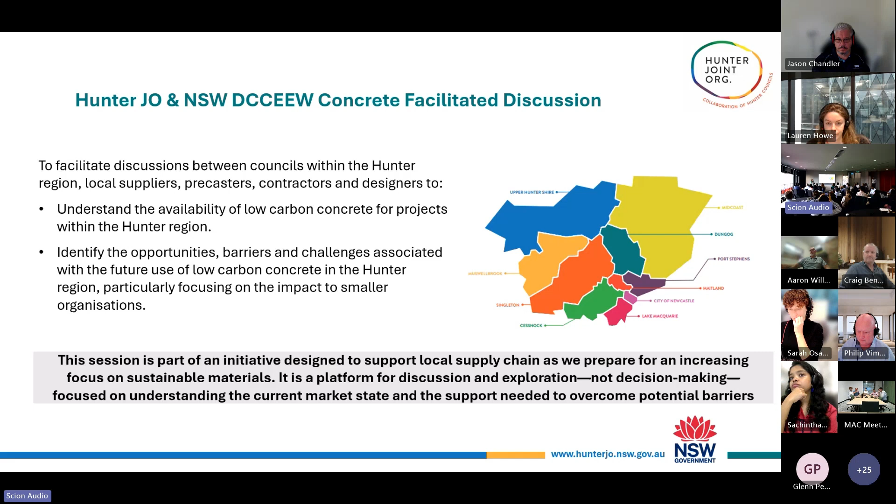I've just gone back, beg your pardon.

So the Hunter Joint Organisation, what are they? I always get asked that when I tell people where I work, and they think I work for like a joint specialist, physiotherapy or something, but we are a local intergovernmental body. We identify key strategic priorities that make sense to work on a regional basis rather than a local basis, and we advocate for these priorities.

This specific event is part of our circular procurement for local government procurement project, and it aligns with a lot of our strategic themes and key opportunities identified by our mayors in the region. It's become obvious to us, in my discussions with councils, that councils really want to support local suppliers - that's a real wish from their point of view. I think we have potential by working together as a region to accelerate sustainability and net zero goals for everyone. That leads me nicely into Chris's slides, who's going to talk a little bit more about why that matters.

Thanks, Susan. G'day everyone, it's nice to see you all here. Aside from the obvious, I thought it was important to talk about some of the recent regulatory and policy changes that have occurred, which impact both the private sector and the government sector in terms of their emissions liability and reporting requirements.

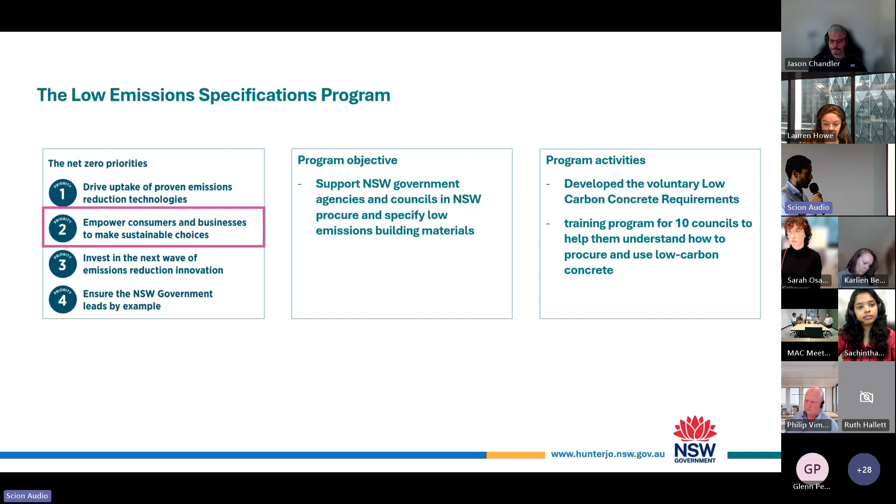Some of those initiatives within that project, the first one was developing requirements for low carbon concrete. Last year, we partnered with a couple of New South Wales government agencies, Water New South Wales, Health Infrastructure, and Landcom, and we developed this requirement.

So we essentially went out to industry and wanted to know what products are available in the market. Based on that, we wanted to nominate some targets, give them to agencies and councils and say it's okay if you ask for low carbon concrete products that have a 50% SCM replacement level.

We know that there are some products available in the market, with the big asterisk that availability might be subject to engagement with your local supply chain, because we know that some of these products are available in metro areas, but they might not be available in regional areas. That's some of the work we're trying to incentivize. The big caveat is it's subject to conversations with your local supply chain.

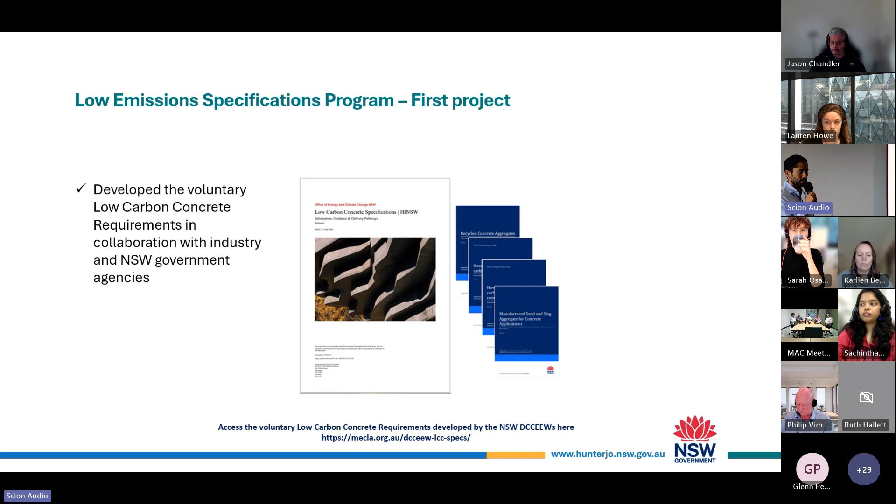After we developed the specifications, we wanted to support agencies and councils across New South Wales implement the specifications. There's about 128 councils in New South Wales. We couldn't engage all of them, but we did start with 10 councils.

And lucky for us, 3 of those councils we engaged are here in the Hunter region, so the Mid Coast Council, Newcastle Council, and Lake Macquarie. They participated in this project. We essentially brought the specifications to them and got everyone in one room in a series of workshops, trained them, and provided guidance.

There were some councils that, even though they had already implemented low carbon concrete products in one of their projects, they often didn't even know that that was the case. It might be that that project was led by a green champion within that organization, and they knew about the implementation of the low carbon concrete product. But once you get the procurement teams and the sustainability teams together, they don't know these products are available because it hasn't been embedded into a more long-term consolidated strategy. So it's still in that kind of state where you might have worked with someone, but their own organization doesn't know there are available products. Having said that, we see an emerging interest in implementation of low carbon concrete.

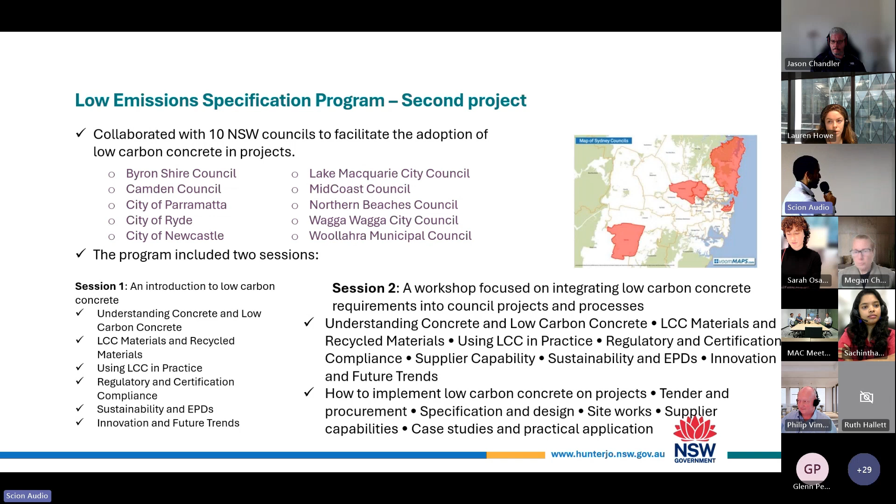So now, call to action. Through our engagement with these 10 councils, the first question was that suppliers aren't seeing the demand for low carbon concrete. So I think one of the objectives of today is we wanted to get the councils together so they can start signaling upcoming demand.

And we also want them to hear that there is local availability of low carbon concrete. Some of their team might be aware, but in general, as councils, they're not really aware. I'd encourage everyone here to reach out to these councils and explain your products, what's available in the market. Talk with those councils about any challenges, like smaller suppliers of low carbon concrete not having access to fly ash. That's the type of issue we want to know about, because connecting it back to funds and grants, that's something the New South Wales government could potentially help with. We know this is an emerging conversation, it's new, so encourage you to have those conversations and let us know about issues and challenges.

If we step back to the most fundamental level of what actually is concrete, concrete is a mixture of different constituent materials. This includes cement, aggregate, sand, different admixtures, and water. We make cement by heating clay and limestone at very high temperatures of up to 1450 degrees, and then grind it together to make a clinker. This clinker is then mixed with a small percentage of gypsum to create Portland cement. We add the gypsum to the clinker to slow down the reaction of that clinker with water, otherwise it would react too quickly.

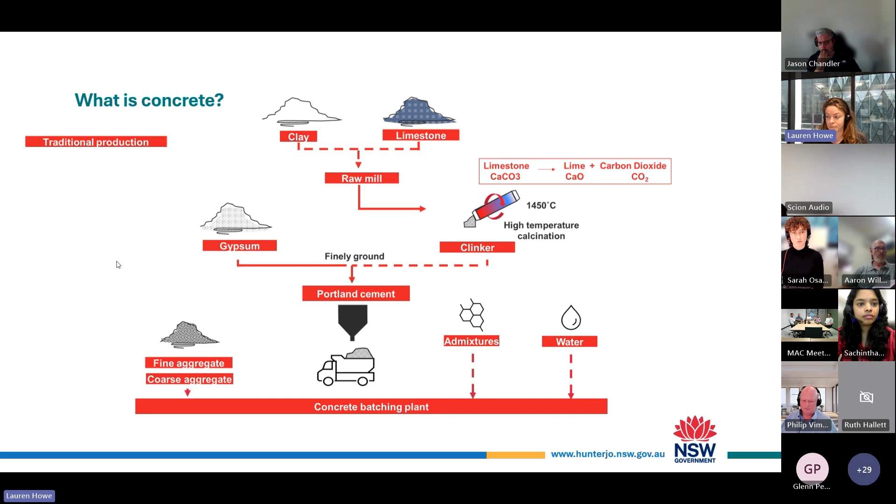Today we are talking about the carbon impact of concrete, so I wanted to explain what is embodied carbon. It is the greenhouse gas emissions associated with the materials and construction processes through the whole life cycle of a building or infrastructure, like a bridge or even a pavement. This includes all the emissions associated with everything from the extraction of raw materials and manufacturing through to transportation, construction on site, and then end of life.

So what is the impact of concrete, and why did we choose as part of the low emission specification program to focus on concrete? A number of reasons for this. Concrete contributes a huge percentage of the global CO2 emissions for one material, about 7% globally. But it is a material that is a bit of a low-hanging fruit - as designers, specifiers, and all the stakeholders working across the value chain of concrete, we have a huge opportunity to reduce the impact.

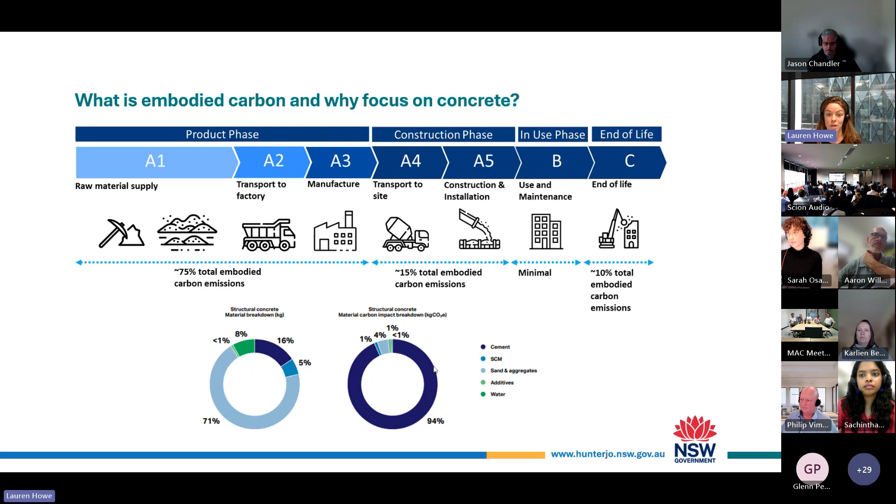This pie chart shows the breakdown of concrete by mass. Around 16% of a typical mix is cement. But when we look at it from an embodied carbon footprint perspective, over 90% of the carbon of that concrete is from the cement. The good thing here is we have a big opportunity to actually start to reduce the amount of cement that we use in our mixes.

So how can we reduce the impact of our concrete? Working back through the process diagram of how we produce concrete, the first thing a manufacturer can do is look at how they reduce the impact of manufacturing that clinker, for example using alternative fuels. Then as we work through the process, you can reduce the amount of clinker that actually goes into the cement - you might have heard of things like GL cement, where you're using higher percentages of limestone.

Then the way, which is the focus of the event today and what most people know in terms of how we reduce the carbon impact of concrete, is to substitute some of the cement going into your mix with other materials. We call them supplementary cementitious materials, or SCMs. Examples of these are fly ash, as Alberto alluded to earlier, which is a byproduct of the coal industry, and blast furnace slag, which comes from the steel making process.

Other ways we can reduce the impact might not be carbon related, but still reduce the amount of virgin material used, is in replacing fine and coarse aggregates. You might replace your fine aggregate with manufactured sand and your coarse aggregate with recycled concrete aggregate. Overall, there are also opportunities that manufacturers are looking into in terms of carbon capture and storage.

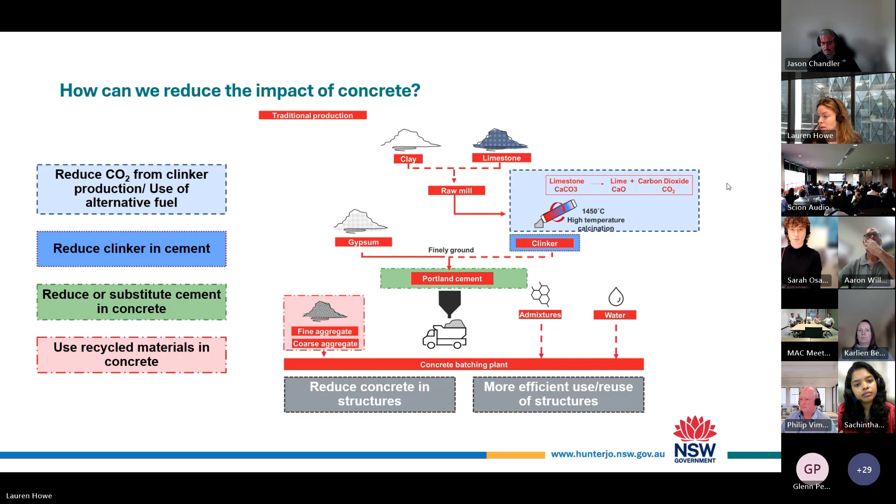You'll often hear people saying low carbon concrete. Firstly, there's not really a globally or even nationally accepted definition, but generally when people are talking about low carbon concrete, they are referring to concrete that has been produced with a reduction in the cementitious or cement content, replacing cement with supplementary cementitious materials. But as explained before, there are other ways a manufacturer works to reduce the impact of their processing and find efficiencies to bring down the impact of their mix.

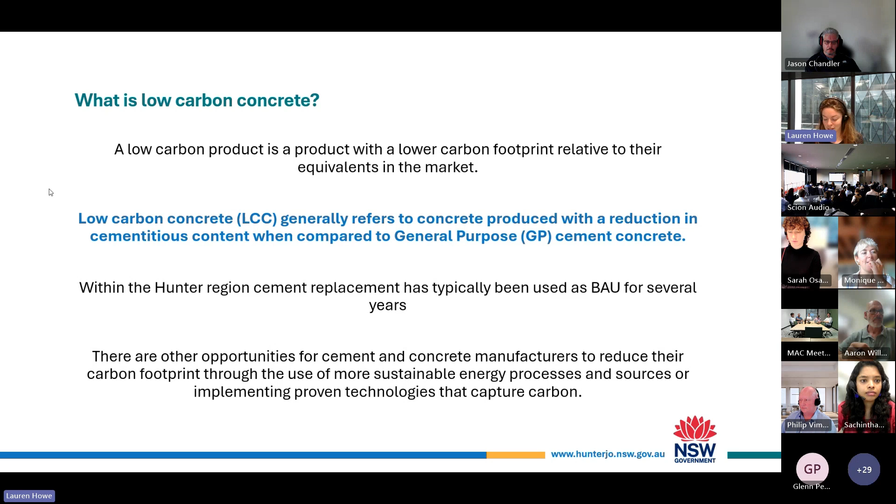I think there's something in terms of the Hunter region. We know that typically higher levels of fly ash are being used than in other regions across New South Wales. So there needs to be consideration that the definition of low carbon for the Hunter region is higher than what might be for other regions in New South Wales, just because you'll find that a lot of suppliers are doing a certain level as business as usual already, because they have the supply of it nearby.

So then, what are the benefits of adopting low carbon concrete on your projects? The main benefit, and why we are all here today hopefully, is the opportunity to actually make real impact and reductions in terms of our environmental impacts, so our embodied carbon and also use of virgin materials on capital and maintenance works for councils.

In terms of durability, the use of fly ash and slag in a concrete mix will reduce the permeability of the concrete, and therefore it helps to improve the durability when the concrete is exposed to aggressive environments. For example, if you have high levels of sulfates or chlorides, such as in a maritime environment.

And the mixes have been, when you speak to the suppliers, they will all be developing their mixes to meet the same properties as what you have specified if you were to use your ordinary Portland cement or traditional mix, and therefore there is no impact to maintenance and therefore no impact on long-term costs.

There are, of course, challenges, which is why this isn't something that's just being done straight away for everyone everywhere. We're aware of a lot of these challenges and barriers, and through the work Arup's been doing, working with lots of councils, we've been collating all these to try to understand what are actual barriers and what are perceived barriers, doing a lot of myth busting.

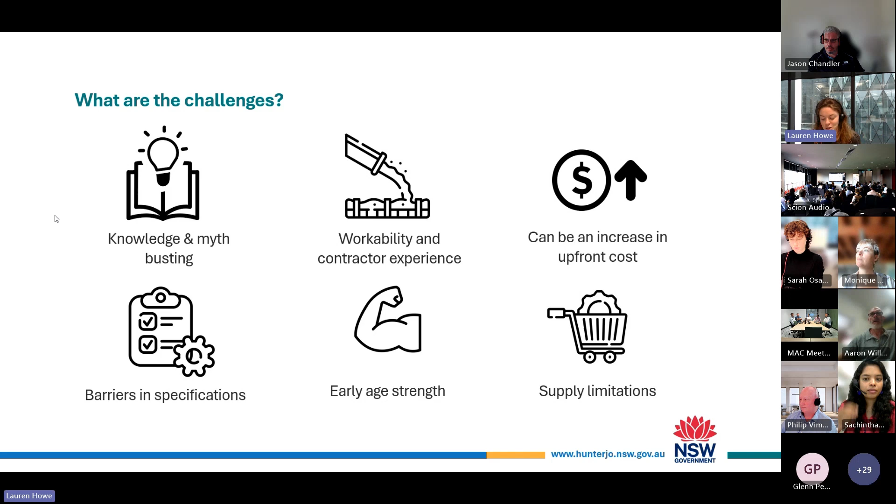And then finally, we put supply limitations here for the Hunter region. I would say this is not an issue, and this is something that Sachi is going to talk through now of what we've found out from your region. We've got many suppliers in the room and online that will be talking about this during the breakout sessions as well.

Thanks, Lauren. So I'm Sachi. I'm also from Arup.

As Lauren mentioned, often we hear supply capabilities as a barrier or a challenge when it comes to using low carbon concrete. From what we are aware of, there are 18 suppliers in the Hunter region, and throughout this project we have engaged with 15 suppliers to get to know their supply capabilities in terms of low carbon concrete.

So we asked them a couple of questions, like whether they provide low carbon concrete, and if they do, what are the replacement percentages that they use, and what types of SCMs, etc. I'll go into the details at a later slide.

So this map we developed to map out the concrete plants in the Hunter region. Each dot represents an approximate location of a concrete plant, not a specific supplier. For example, one supplier can have 3 plants, 3 small dots scattered around the Hunter region. I should say that this is based on our engagement with suppliers, and also we did a Google search to find out concrete plant locations. So there could be more plants, and this is just an estimate.

So for most of the councils, we have a minimum of 2 plants within the region, within their boundaries, or within a 30-minute drive.

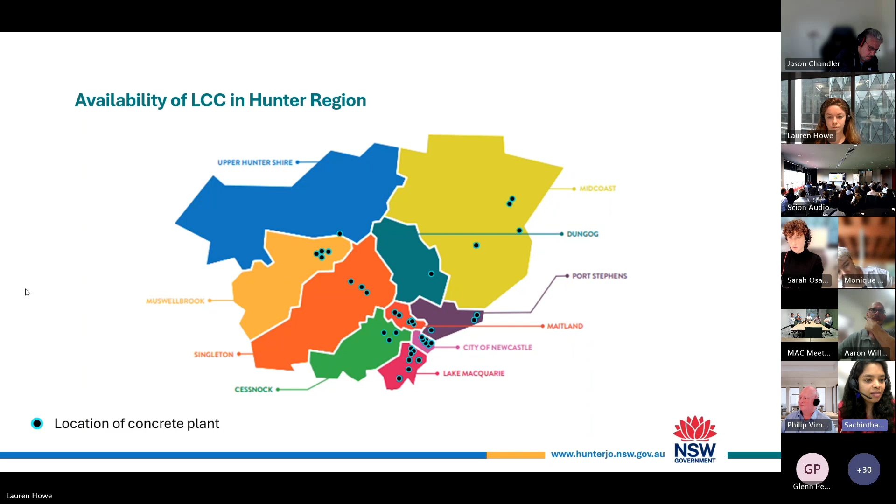Moving on to the questions, from these 15 suppliers we engaged to get low carbon concrete, we focused on getting information on fly ash and slag, or GGBS, which refers to ground granulated blast furnace slag. Most of the feedback we got was positive.

They do have low carbon concrete in the Hunter region, and we have received 2 feedbacks from 2 smaller suppliers saying that they don't provide low carbon concrete.

Also, we got to know from most of the suppliers that they already include a percentage of fly ash in their mixes as business as usual, like Lauren mentioned earlier. So in that case, they don't specifically name these mixes as low carbon concrete, but they do have a percentage replacement of fly ash in their mixes already.

In terms of replacement percentage, I want to highlight the word replacement, that we ask for a cement replacement. So it means these mixes have to replace some cement content with SCMs. It is not simply adding SCMs on top of the cement content that you already have in the mix, because if you do that, it won't be low carbon concrete. It will have a higher embodied carbon compared to concrete without SCMs. So it is important to highlight this is a cement replacement.

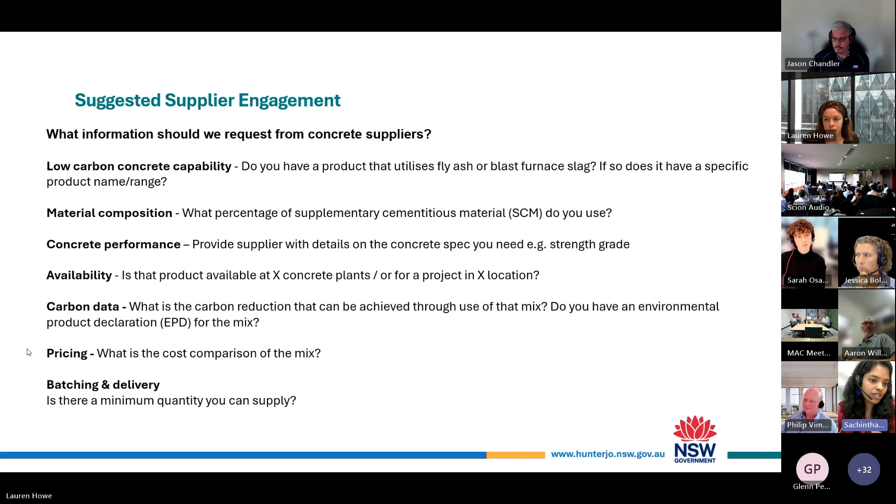So that's the section on supply capabilities. Thank you.

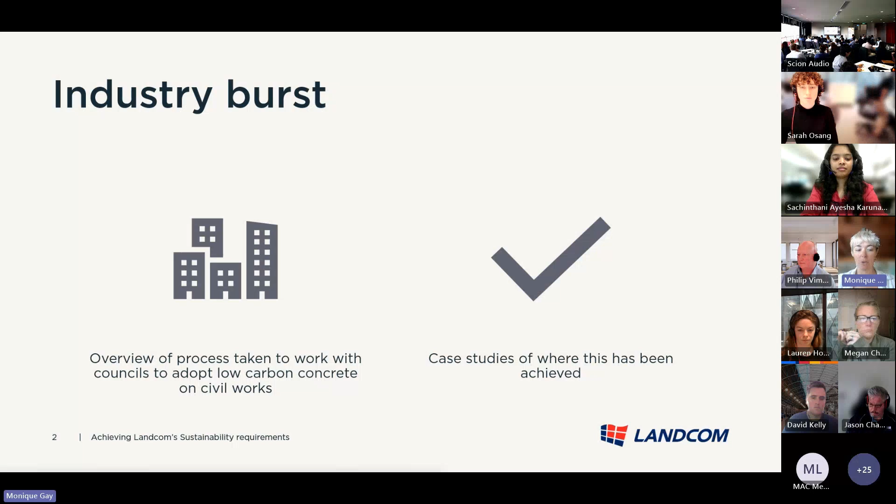I'll touch on our key drivers first in terms of adopting low carbon concrete. Our Sustainable Places strategy was adopted in 2017, and we're now well on our way delivering that as we look towards our 2028 leadership goals. One of those goals, which was quite bold at the time, was to enable carbon neutral, water positive, zero waste, and net positive ecological outcomes by 2028.

Over the past 12 months, we've taken the next step and pivoted towards our transition to net zero. While we don't know how to fully decarbonise the built environment at the moment - it's a bit of a beast - we do know we need to adopt all the low carbon materials and technologies available to us today in order to get there in time.

So why civil in particular? We've estimated that our construction activities are responsible for around 75 to 90% of our scope 3 emissions. While our corporate operational emissions sit at around 1,000 tonnes of carbon per year, that's roughly the same as the emissions from providing civil infrastructure for just 200 homes in one of our communities.

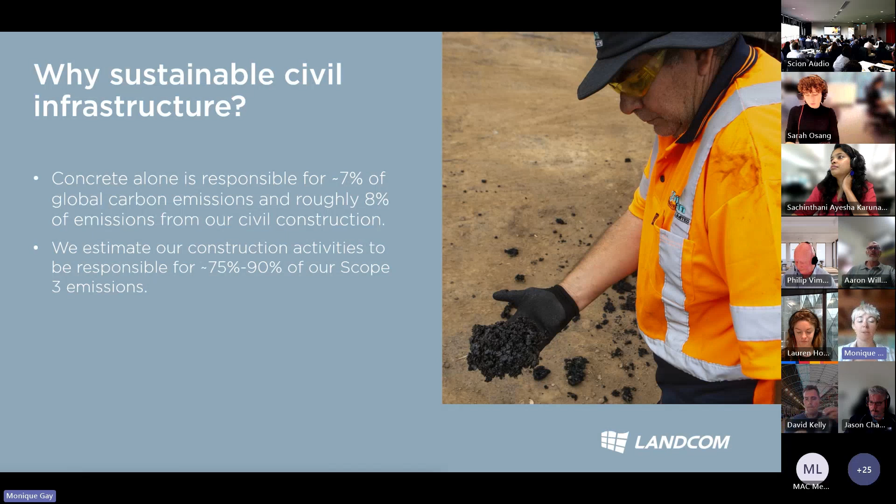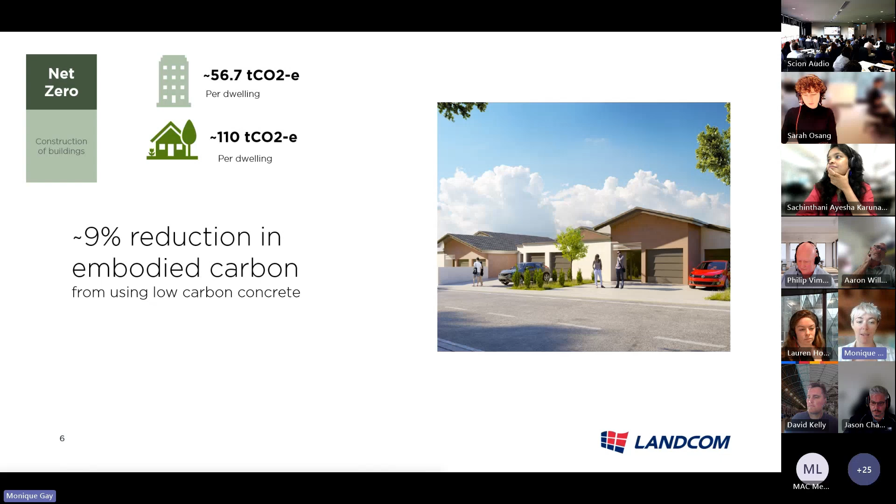We know concrete is responsible for around 7% of global carbon emissions, but it's also responsible for around 8% of the emissions embodied in our civil works, and a massive portion of the carbon embodied in the homes we're building too. Modelling to date shows we can get around 9% reduction in upfront carbon by using low carbon concrete - it's a massive reduction, that low hanging fruit, the carbon wins we need to get to net zero.

So far we've received approvals for widespread use of low carbon concrete in the infrastructure for a few of our projects. I'll focus on two today: MacArthur Gardens North in Campbelltown City Council has used low carbon concrete for all the curbs and gutter, and North Wilton has used low carbon concrete for all the curbs, gutter, driveways and footpaths. We're now looking at using low carbon concrete for all the precast stormwater pits and pipes too, and have had those discussions early on with suppliers.

So for our Panorama at North Wilton project, that was our pilot for our sustainability inclusions in our civil works contract, requiring the use of low carbon concrete, solar powered site sheds, recycled asphalt, and sustainably sourced steel and timber. We used this project as a test case for our new contract inclusions, to test the market and see where it was at.

Our approach was separating into two categories. One, the mandatory inclusions - that's what we knew the market could deliver without limiting contractors submitting for the job. That was key to get buy-in from our project team, because they were worried we'd scare off half the contractors and limit their choices.

Then the comparative inclusions - that's where we wanted to push the market to deliver. Those were the exciting ones we used to compare tender responses. In detail, that was us requiring them to provide a provisional amount for the use of these more innovative materials.

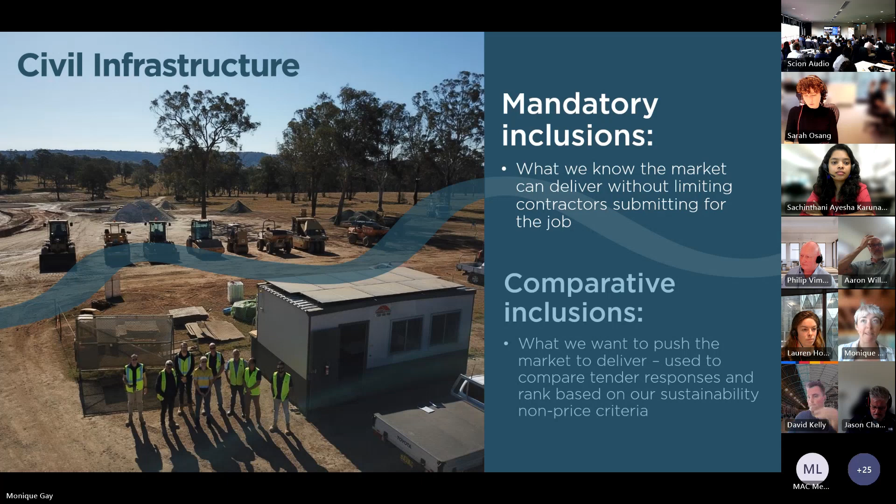Three key factors made it a smooth project for us. The project team were keen to embed sustainability into the kickoff meeting with council before construction started, and then throughout weekly construction meetings on site. This meant we were all on the same page from day one, and the contractors knew meeting those sustainability requirements was a priority. It also provided a space for me to offer support to the contractor when needed, when they were getting confused or worried.

Council were also at the table from day one and agreed to trial those new materials with us to achieve our shared emissions reduction goals. I think it really helps if you have the council engineer, asset maintenance person, and a sustainability representative involved in those discussions from day one, because it helps understand what the key internal drivers are going to be for council, and how perceived risks might be managed through internal processes and approvals.

Thirdly, from day one it was really taking a partnership approach. So when contractors had pushback, we'd offer to reach out to suppliers ourselves and gather that information, or work with council to smooth that over.

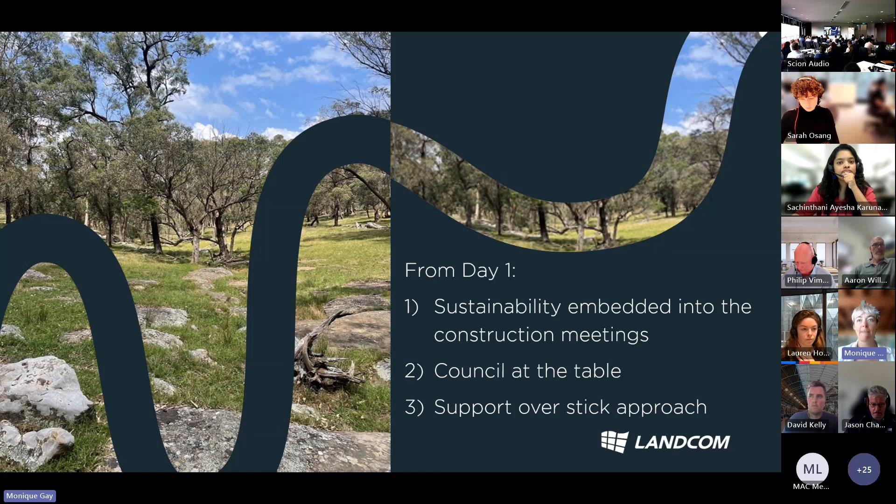We'd never done anything like this before, and we were really feeling around in the dark. But we were firm on taking that perceived risk and learning from our mistakes if there were any. We made sure to flag in our procurement documents going out to market that this was just the beginning, and that we'd be ramping up our sustainability requirements in the future.

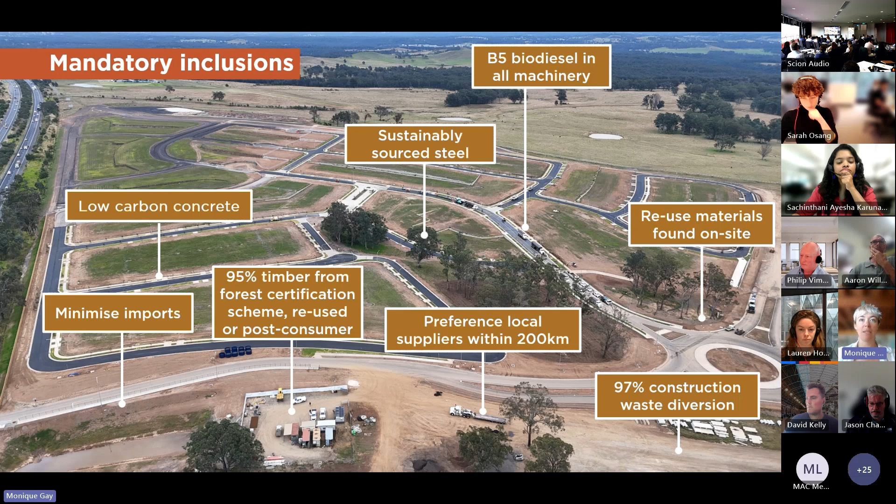I've listed some of the mandatory inclusions up here, but we'll just focus on low carbon concrete today. As a government organisation, we have strict protocols around how we procure services and spend public money, so we can't just go out and say, buy this very specific low carbon concrete product.

So we assigned some of our choice to price, but a good part of our decision is based on non-price criteria, including sustainability. The comparative inclusions allowed us to rank submissions based on sustainability and their ability to deliver things like low carbon concrete. The tenderers knew that because it was embedded in the tender documentation. They were also required to submit either an EPD or something equivalent to demonstrate that reduction in embodied carbon of the product they sourced.

And so when it came down to it, obviously the people who pulled together that tender submission understood the task, but then on the ground, the site manager and the contractors - we'd also bring them on the journey. Dave, the site manager, he's an absolute character and became my favourite on the site. He pulled me aside after one of the meetings and was quite worried and a little bit mad, I think.

He was like, what's all this low carbon concrete stuff about? What's wrong with normal concrete? So I explained the environmental impacts of standard concrete, and while it's an incredibly useful material, we do need to rapidly ramp up our use of low carbon alternatives. I explained there's not a massive difference between the two - as someone who really doesn't know much about concrete, I did my best.

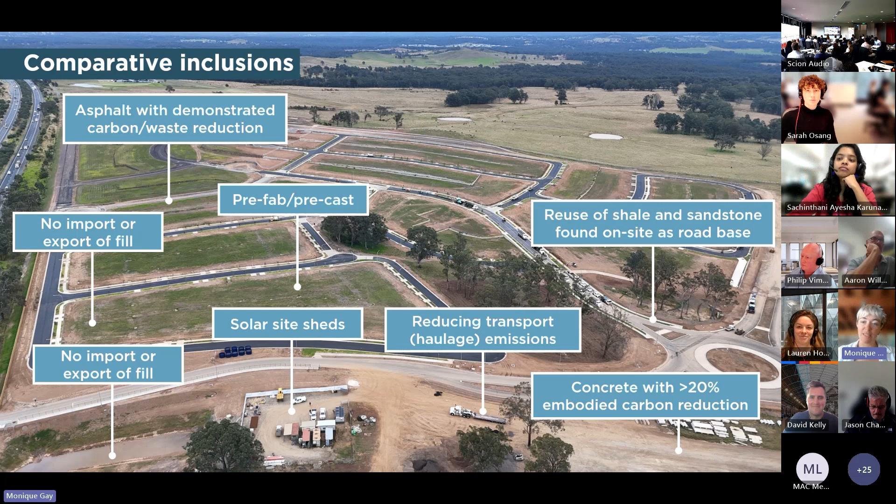We expected some hiccups from our contractors, as we'd never worked with low carbon concrete before, and we'd heard that the workability would be a little bit different. But Dave pulled me aside a few weeks after they'd started pouring low carbon concrete to comment excitedly on how easy it was to work with, and how they couldn't actually tell the difference between the low carbon concrete and the standard concrete they use. Which thankfully goes against that narrative we do hear sometimes.

So for our Macarthur Gardens North project, approvals with Campbelltown were a little bit trickier. Landcom is working with TRN Group to construct all of the enabling infrastructure for our Macarthur Gardens North development. Campbelltown City Council is the approval authority for the infrastructure works, and will be the proud owner of that sustainable infrastructure asset once construction is complete, including the maintenance and ongoing monitoring of that asset performance.

While historically Campbelltown Council have been conservative with their adoption of recycled materials and low carbon materials, we knew that we share net zero goals with council, since our scope 3 emissions are ultimately becoming their assets. And that there had to be someone in council who was trying to get initiatives like this off the ground too. So the main success of this project was that we connected with the Sustainability and Resilience Manager at council to kickstart that conversation internally.

Together we set up an initial conversation with council's engineering and assets and maintenance teams. That was really crucial, as council's sustainability manager drove a lot of that internal change that was required to enable approvals for pilots like this.

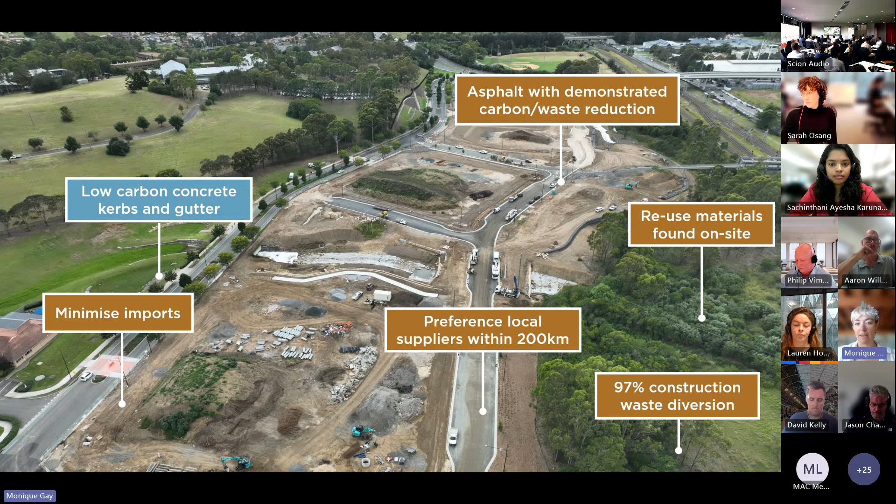We started the conversation early on, and I think I read a specific question about that. It was around two to three months before we needed to place the concrete order, just to give us enough time for that back and forth between council's engineers and the material suppliers, chasing up that performance information to give the engineers confidence. And commenting on the previous discussion as well, we've seen it through a few of our civil projects at the moment that even if you can't lock in that low carbon concrete product at the very start when you sign that contract with your contractor, they haven't placed that concrete order yet.

So there's still opportunities along the way to educate them, to bring them on that journey and to source alternative products throughout that construction process, so long as that happens before they end up needing to place the order, because obviously you don't want to have any kind of project delays.

I'd love to take all the credit for the success on the Macarthur Gardens North project, but the biggest driver was really knowing the council sustainability manager was equally invested in using low carbon concrete. So when it felt like we couldn't come to an agreement, council's general manager ended up getting involved to help strike that balance between minimizing risk and driving the necessary change to reach council's sustainability targets.

In the end, the data showed that the low carbon concrete products available to us had improved performance and durability, all while delivering that reduction in embodied carbon. And that really did get it over the line.

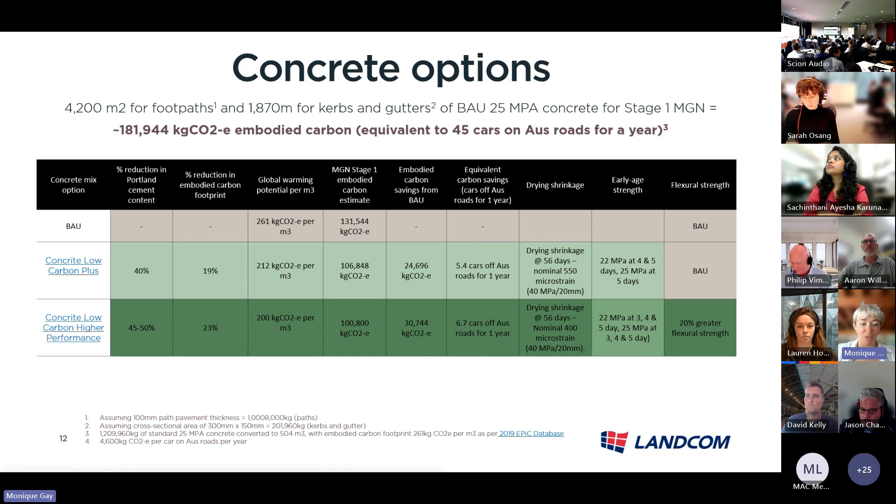I know I've been racing through really quick, so sorry. But the three main lessons learnt from the process for us are: one, treat it as a learning experience for everyone. Those early conversations with the civil engineers and with council were really key for us, but so are those regular meetings on site. And don't be afraid to call up suppliers and ask the dumb questions, because they're often not dumb, and they'll get you over the line.

Transparency was also important for us during the procurement process. So explaining why we included each sustainability initiative and how we plan to upscale each initiative over time sent that market signal to our suppliers that this wasn't a one-off and that they had to create that organizational change to get there.

And then third, just perfection is the enemy of action, really. So the final lesson was to just get on with it, even if we didn't have all the answers up front. So creating an environment where the contractors feel comfortable to ask questions and innovate. In the end, it actually meant that we had built this relationship with our contractors where they now come to us with suggestions on how to reduce carbon or to replace materials with sustainable materials. So not only does it make it easier to get those approvals, but also just takes a bit of the load off the sustainability guys too.

And that's all from me today.

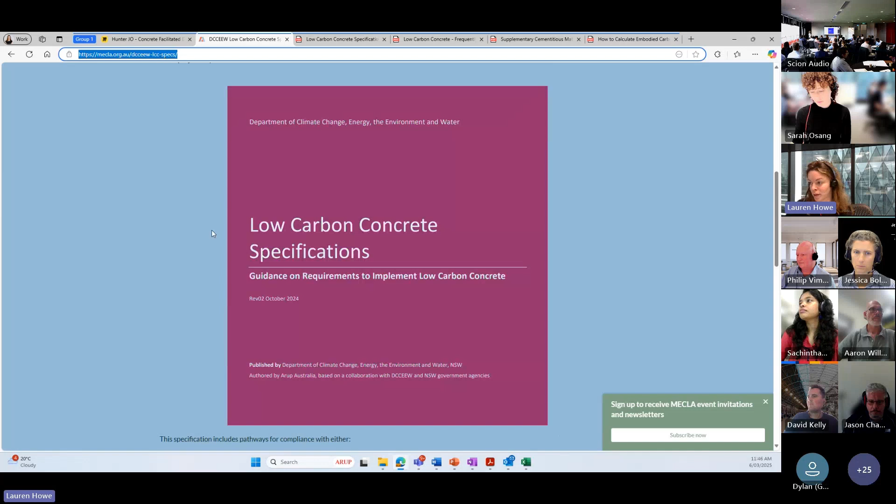They were asking about where's best to find information, and so I just wanted to do a plug for the work we did that Alberto showed earlier. It's available on MECLA. There are specifications that have been written, there are clauses you guys can use, and there are lots of fact sheets around frequently asked questions. And yeah, we're making more stuff for councils. I'm going to pass back to the room.